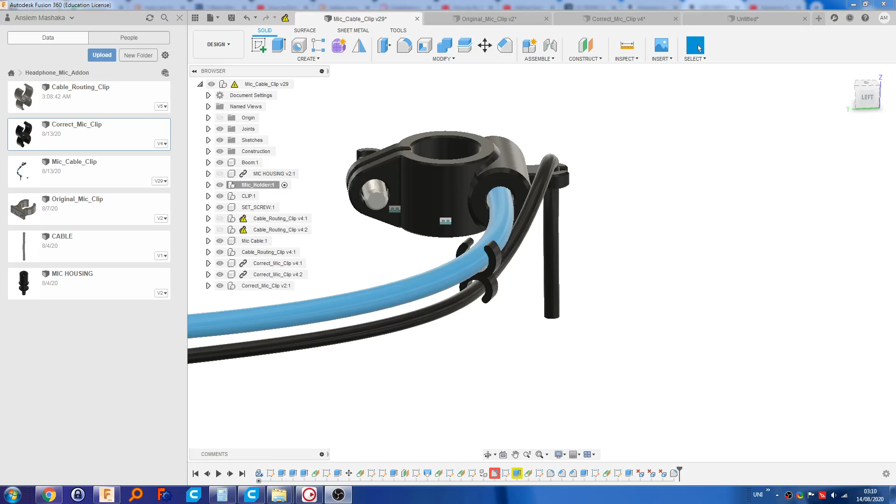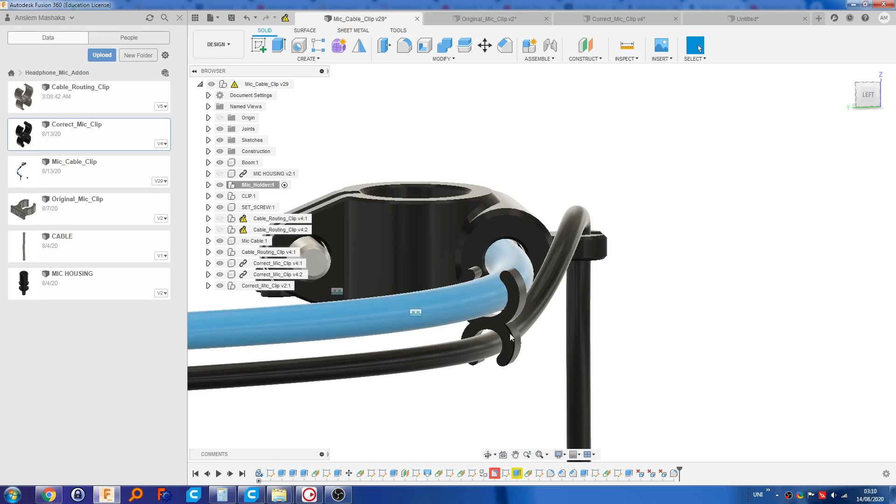To make this clip, which is useful for combining cables like this, it can be a little tricky. It might look simple, but the problem is if you don't have the right gap, the plastic won't be able to flex around and flex back into position. So this is why I wanted to make this video, because it took me quite a few times in 3D printing to get the right technique so that this would work every time.

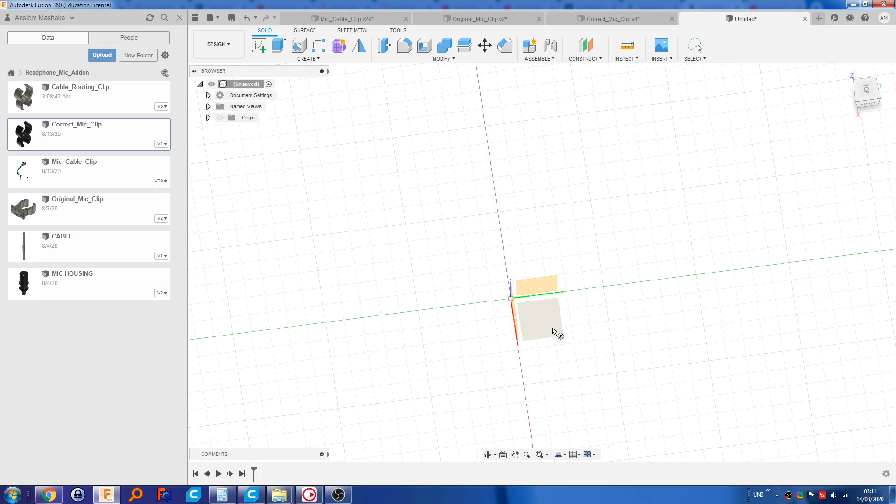So to make that sort of clip, I'm going to create a new sketch on the ground plane. I have my automatic face turning off, so I have to click manually here. Let's create a circle. I have a little problem with Fusion where if I type the dimension out as I'm creating a circle, it doesn't stay as I put it, so I have to type it twice. Please ignore that.

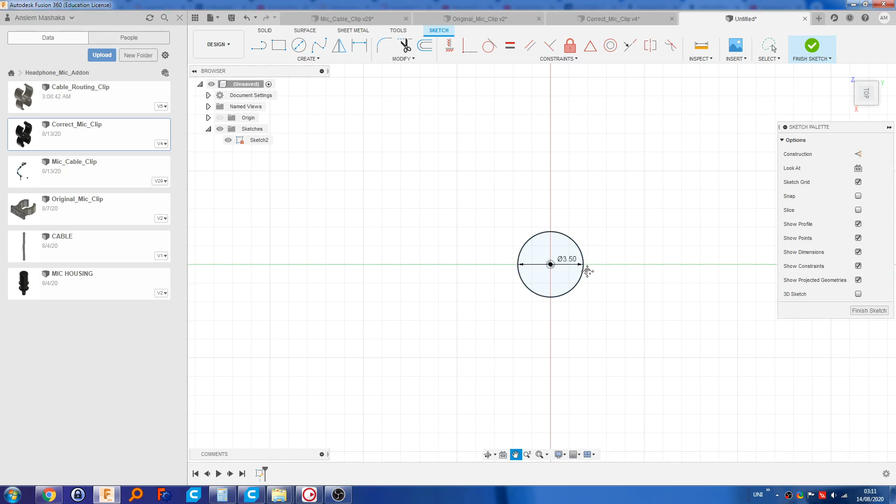3.1 is the size of the cable I want to hold, but I want to add a 0.4 clearance. This time it worked, but usually it doesn't. We're going to add a 1 mil wall thickness, so we're going to offset it by 1 mil. To do that, press O on your keyboard, or you can go to modify and offset.

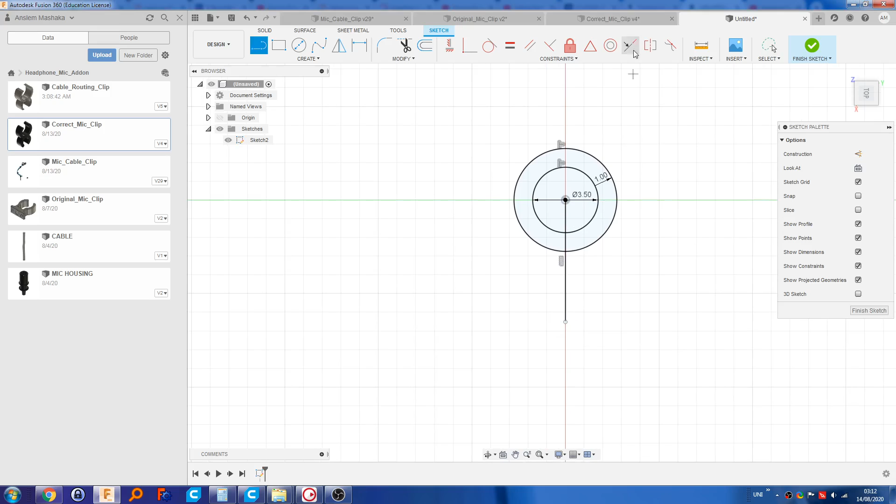We're going to draw a line down, doesn't matter how long, just using it as a guideline, and then create a new circle. This cable is 2.15, and we're going to add a clearance of 0.4 as well. You can see it's not what I typed, so I have to type it again, which is really frustrating. But let's do that, plus 0.4. There we go. And we're going to give this an offset of 1 mil as well.

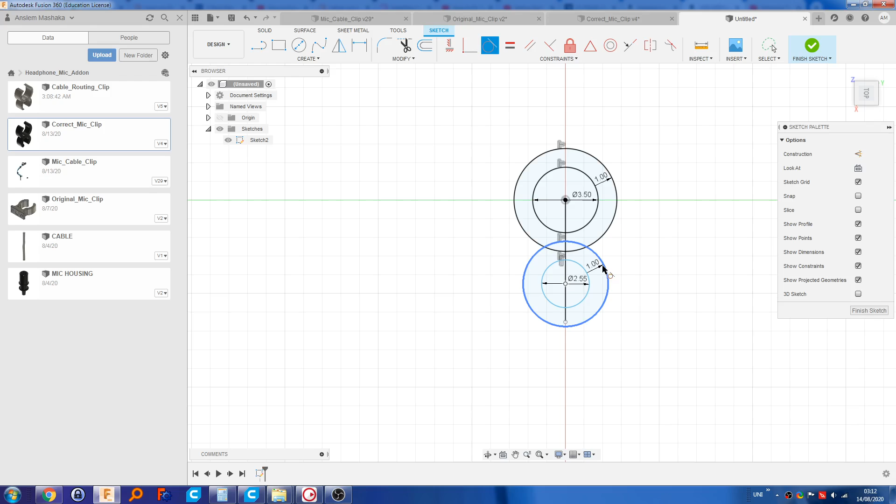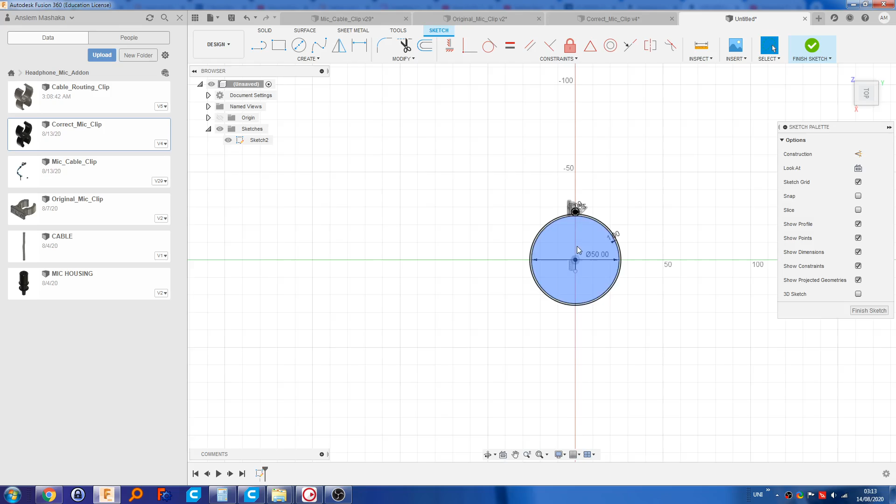Now I'm going to use a tangent constraint to join this perimeter to the inner circle. This will minimize the amount of space between the cables, and it will also set up a much needed constraint. So I'm going to click here and click here. You can see now the lines have become black, which means if we change the value it will update properly. If we type something like 50 now, you can see it's still tangent to this edge, whereas if we didn't have it black, it would be all over the place.

So let's go and extrude this. Actually, before we do that, to make the gaps for the cables to slide in, my technique is to take 60% of the inner diameter. So if we do 3.5, 60% of 3.5: 3.5 divided by 100 times 60 gives me 2.1.

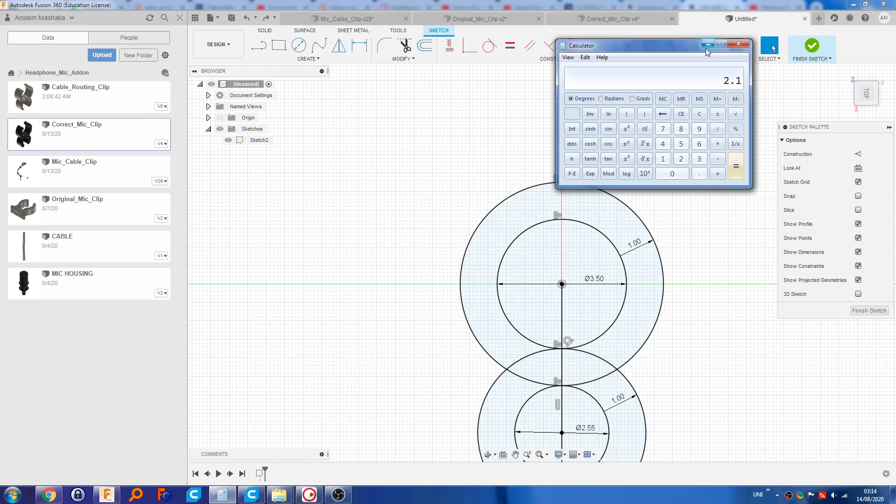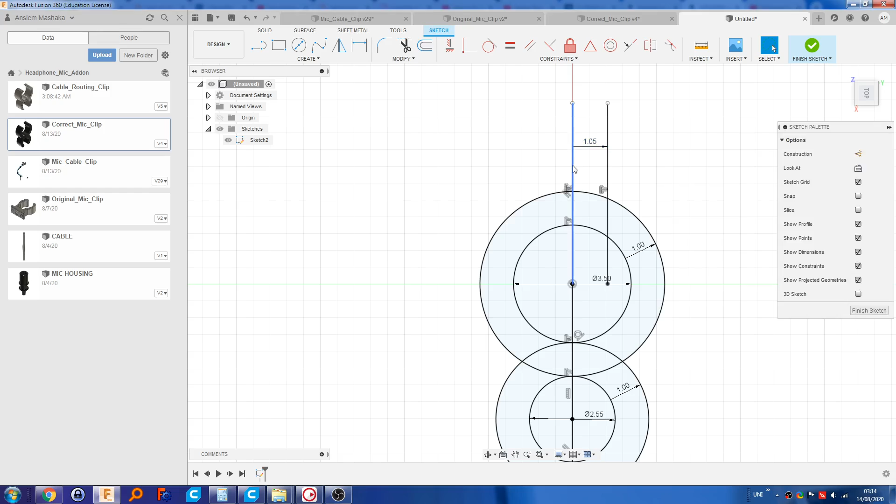What we can do is draw a line up, doesn't matter how long. Press O for offset, offset this by 2.1 divided by 2. This will give us half of that. Now what we can do is, see this is D17, we can offset this and put minus D17. So whenever we change this, if we ever do, we will get the same amount on the other side.

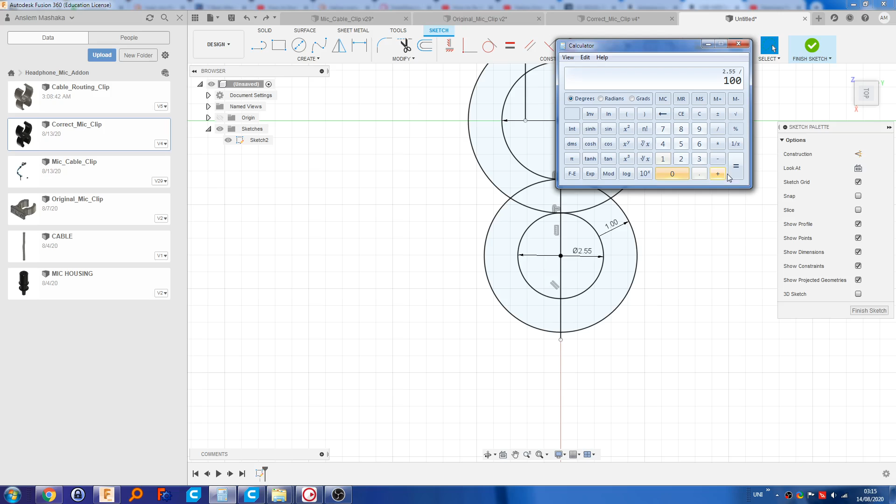So if I just show you, for example, let's put it back. And now we need 60% of 2.55. 2.55 divided by 100 times 60 is 1.53.

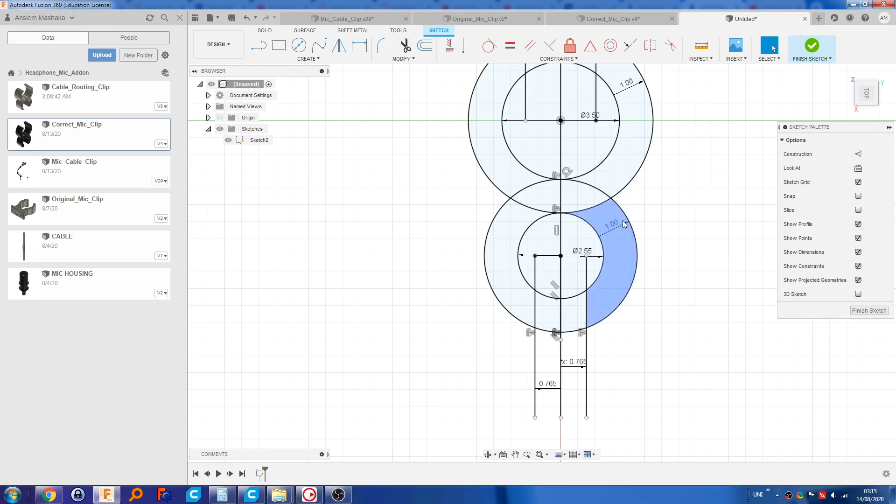Let's draw a line down, offset by, what was it, 1.53. 1.53 divided by 2. This says D19, so we're going to offset this by minus D19. Everything's still black, which is what we want.

Now what we can do is extrude all the portions that we want, which is that. We're going to extrude this by about, I don't know, 3 mil maybe.

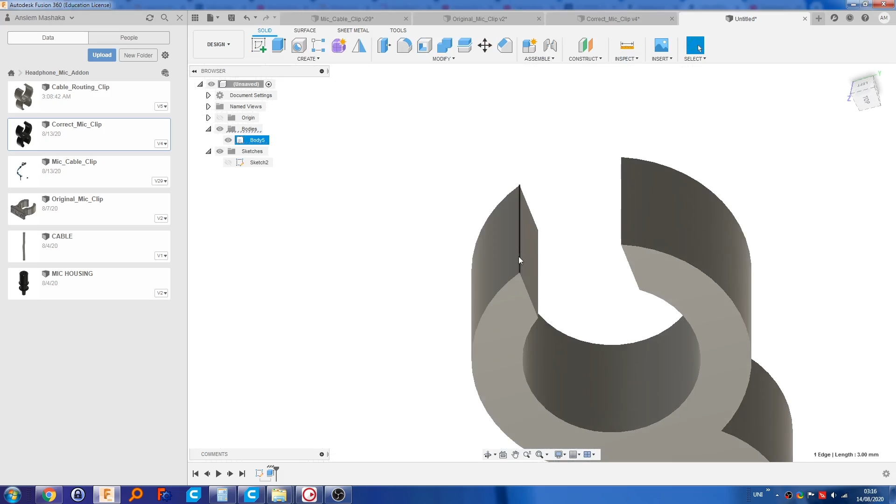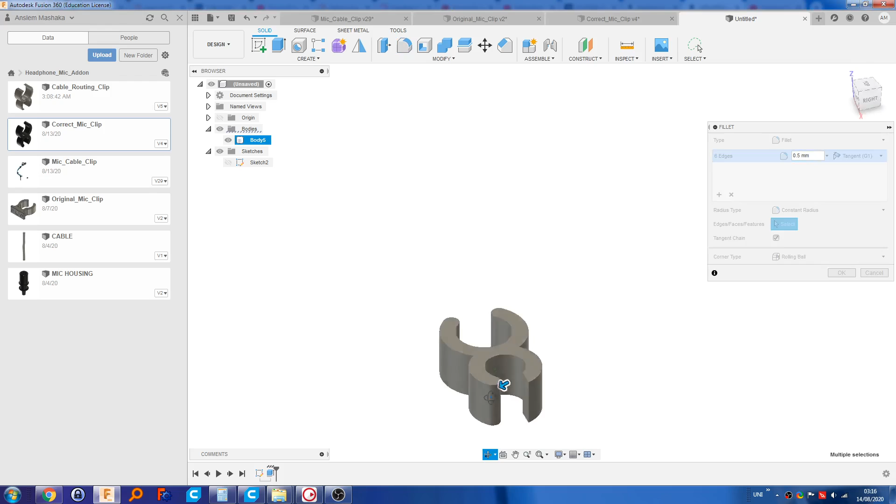So we got this. What I like to do next, which is also quite needed for the cable to go in properly, is a fillet. Press F for fillet, we want to type in half of what the thickness was, which we used 1 mil as the offset. So we're going to put 1 divided by 2, or could just put 0.5, whatever. We want to do that for all these surfaces, edges. There you go.

One thing you could do to make this look a little nicer, and probably even increase the strength, is to put fillets in these pinch points. Probably 2 should be fine, even 1. And there you go. I wouldn't bother really.

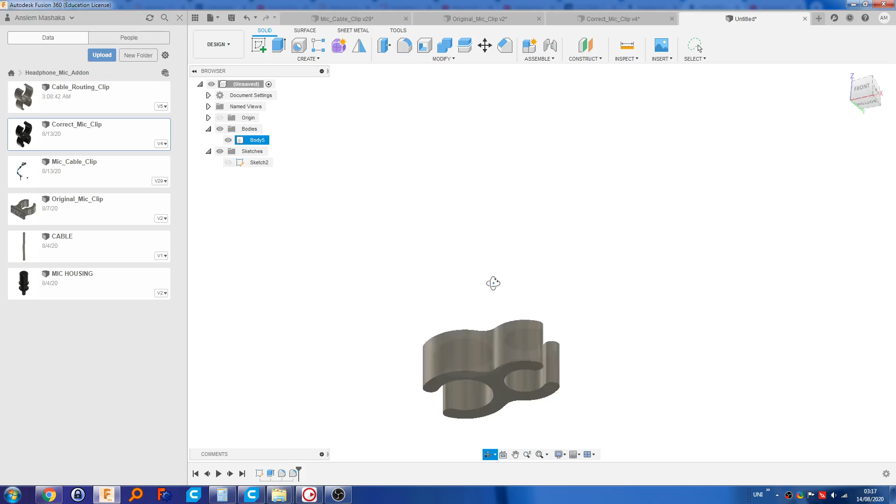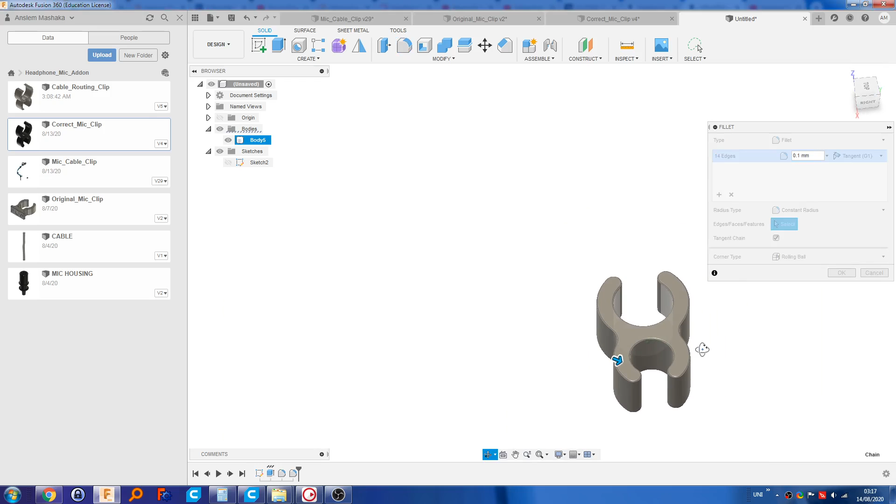I used to add fillets, very small fillets, like 0.25 or 0.1. With 3D printing, there's really no point in doing this. One, you're not going to see it, and it's never going to come out like this. And to be honest, it just prints a lot nicer when there's no fillet on these edges - you get a much crisper edge.

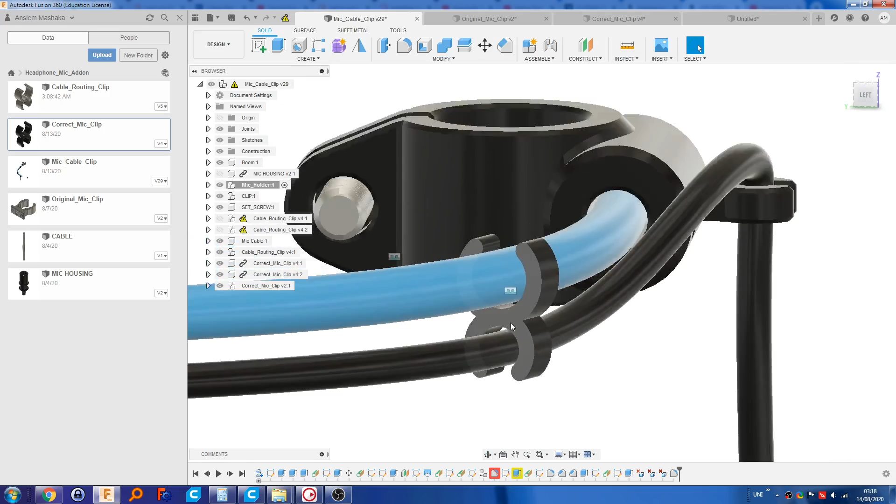Anyway, I hope that helps. These may need a little force to get them in, but they should work fine, and you'll be able to hold cables like that. And yes, I've printed these out and they work just as they look in this model. So yeah, hope that helps. Goodbye.